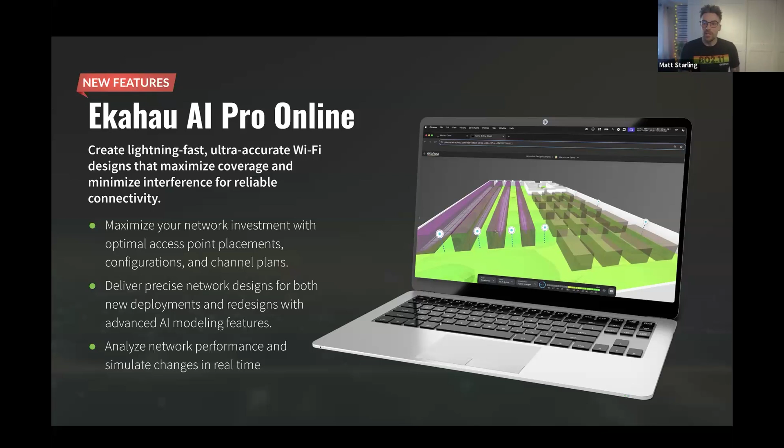There's something I'd like to point out with our Ekahau AI Pro Online: we actually give you two different ways that you can design Wi-Fi networks. Most of us are very familiar with this option on the right-hand side, which we refer to as the traditional method for predictive modeling, designing an RF network, where you take a floor plan, upload it to the software, set a scale, draw your attenuation values for the materials in your environment, draw in areas where you'd like coverage, place simulated access points, and see the heat maps coming from those access points to plan your network.

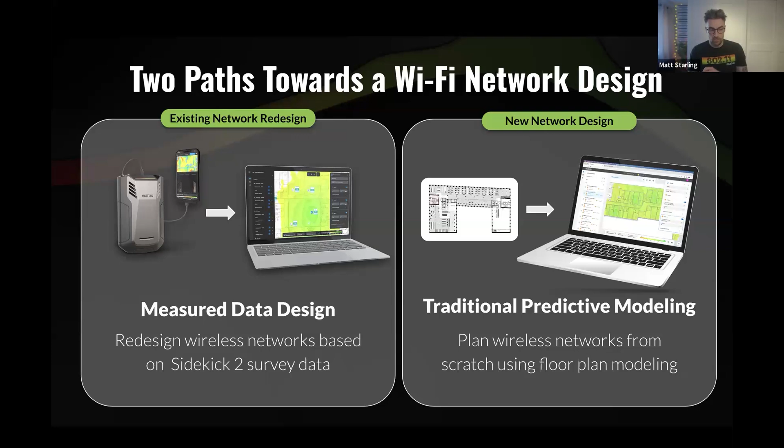We're all kind of used to doing that, but we actually launched a new method to update and design a new network leveraging measured survey data collected with the Sidekick 2 — this option here on the left hand side. So let's say you've already got an existing Wi-Fi network; you can get on site, do a survey with the Sidekick 2, and push that data to Ekahau AI Pro Online without having to draw any walls or obstacles or attenuation values for your materials. We understand how RF propagates in your environment, so you can simulate changes like moving access points or swapping them out for new model access points to see the impact of a network upgrade.

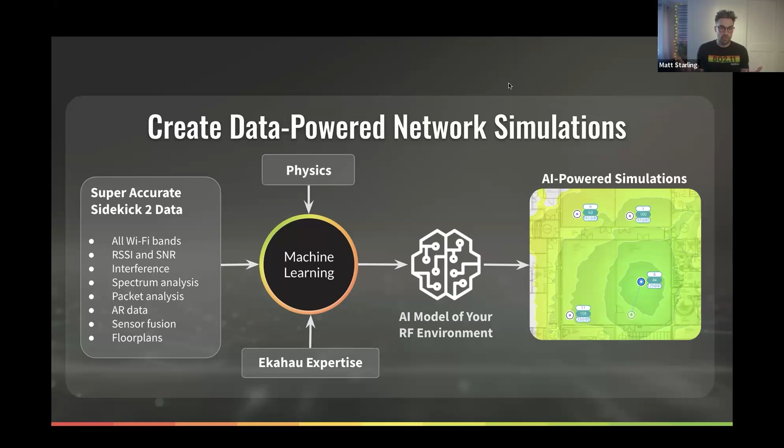The way we do that is once you've captured the data with Sidekick 2, we use machine learning, AI, and a lot of Ekahau scientists' and data analysis engineers' work to build out what we refer to as a digital model of your space, understand how RF propagates, and then simulate upgrading to a new model access point. You can go from one vendor to another. One of the most popular things I see with AI Pro Online measured planning upgrades is simulating going from older networks — just 2.4 and 5 gigahertz capable access points — to upgrading to a 6 gigahertz capable model access point that can maybe do Wi-Fi 7, if you're at that kind of life cycle upgrade point.

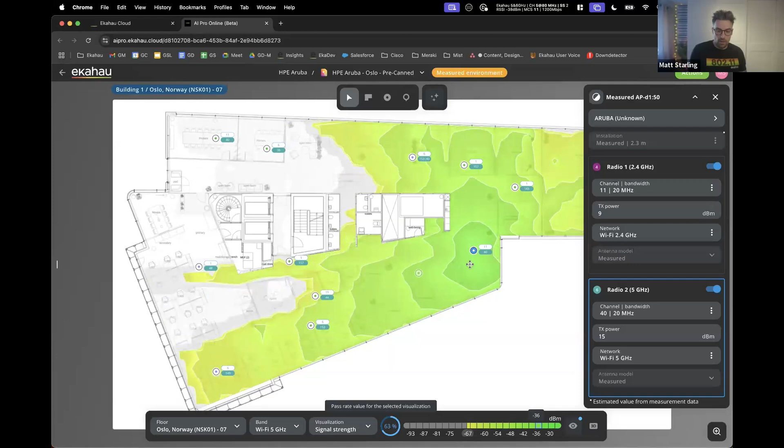That's something we can simulate. Or maybe they wanted to know, if I was to relocate this access point to a new position, how would that impact my coverage or the signal coming from this access point? All I need to do now is simply grab the access point, move it around, and you'll see the heat map will actually update and change without me having to draw anything like a wall or any kind of obstacles. You can see that change in RF propagation from the access point location.

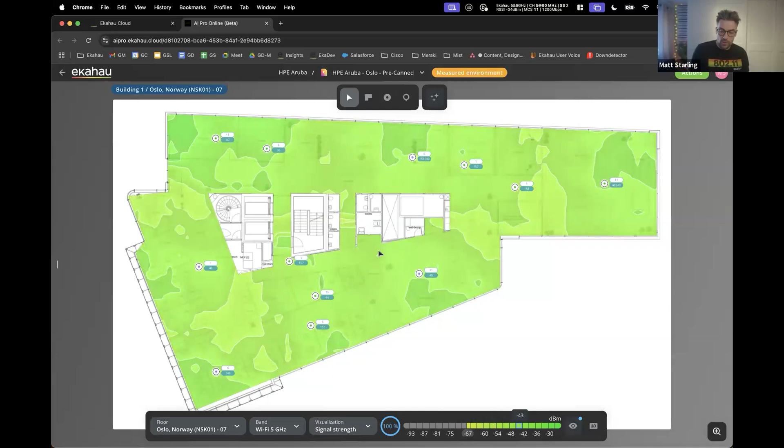So if I want to simulate doing a rip and replace scenario, like a one-to-one replacement and keeping the AP positions, what I can actually do is select all of these access points from the left-hand side, then on the right-hand side, pick my target access point. I'm going to stick with Aruba, and pick a Wi-Fi 7 capable model, so the AP755. As soon as I do that, it now just swapped to a Wi-Fi 7 model of the access point.

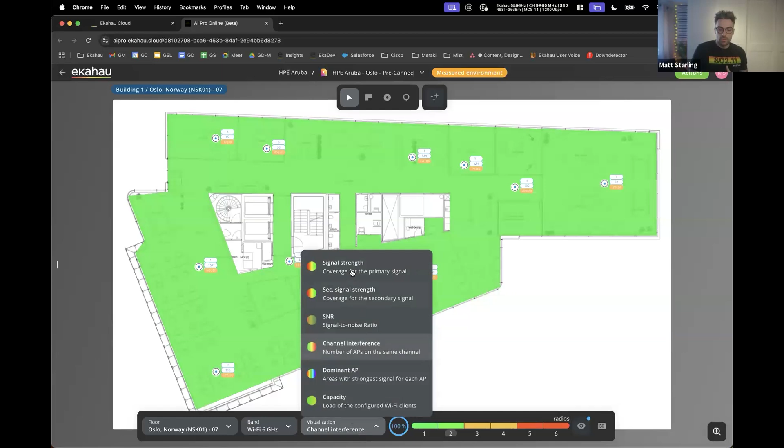If I just close this on the left-hand side, what I can actually see now is the predicted 6 gigahertz coverage based off the measured data collected from the Sidekick. Now I can see the signal strength, the secondary coverage, things like channel interference and lots of information, which is really helpful and handy.

One of the things I used to get asked all the time when I was being engaged for professional services before I joined Ekahau, speaking with customers, they would always ask when we were going to do a deployment for them, a new network design or an upgrade, if they could keep some of their existing AP locations so they can reutilize the cable runs. Sometimes the most expensive thing for a Wi-Fi network upgrade is not buying the access points, it's actually running new cables - think about the downtime, especially in critical environments like hospitals, and how expensive that can be. I can understand why customers want to try and reutilize existing AP locations because of the cabling.

So what you can see here is if we were to keep the existing AP locations, coverage, everything looks like it's going to be okay. However, if we did notice that maybe there was a bit of a coverage gap in this location, we could tweak the positions of the access points, like move them around slightly.

Or if I wanted to, I can come in and actually add another access point as well. So I haven't got to just keep the APs in their existing positions. I can come into here and pick another Aruba 755 access point, and add as many extra ones as I need to my environment to come up with a new design for the space based on a different frequency band that we couldn't actually see before. So it's a real nice, cool way of being able to design or redesign your network based off measured survey data, and it's nice and accurate.

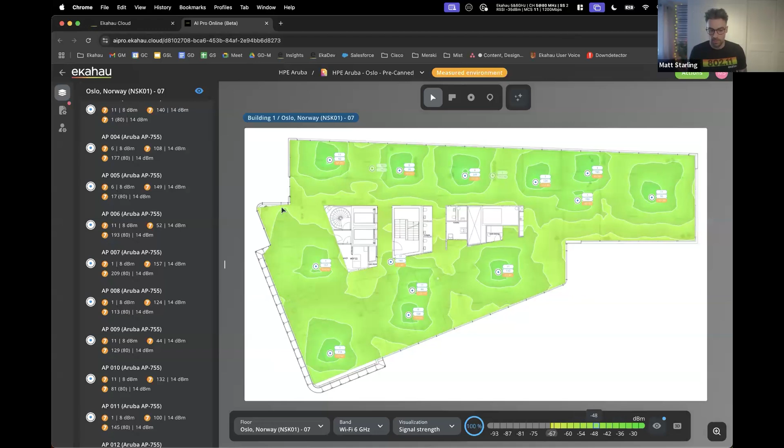So what I'm actually going to do now, unless there are specific questions that have come in, Troy or Stu, around this method of approach for AI Pro Online... We've had a technique for a long time where if you're going on site anyway, as part of your initial on-site investigation, you could manually measure walls and determine the attenuation, then take that back and update the predictive wall model you're building. But is this technique more accurate than what we've already been able to use?

Yeah, that's a great question. The research team did some analysis based on users defining attenuation materials manually versus the measured approach tied to an AI/ML model, and this method is more accurate because we're looking at the complete picture, basing it on real measurements, and understanding how RF is propagating in your space. So not only is this faster, it's actually more accurate too, and it's a lot of fun. So why don't I pass over to you, Troy, and you can show the other methodology of using AI Pro Online.

Yeah, for sure. So that was a question Jamie had in the chat, just wondering about the comparison of the old school manual method versus this technique. Essentially, you can think of it as instead of just taking one individual measurement, you're taking thousands of measurements as you're walking along, performing best practices for your survey.

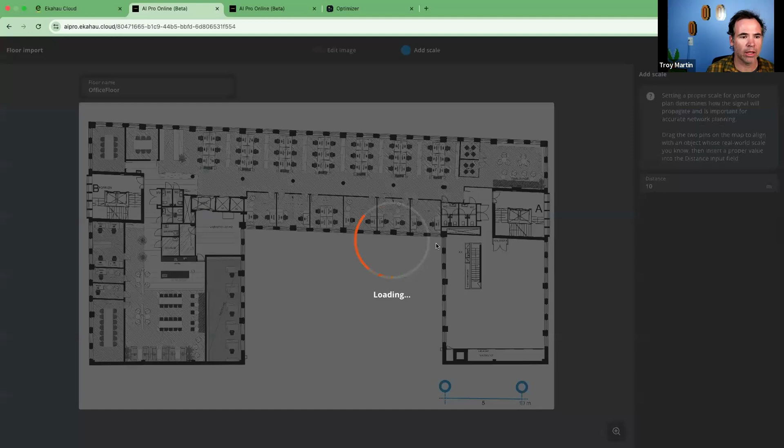Once that's set, we can go ahead and click on finish, import this map image for us. We have the ability that if we wanted to create multiple floors within our building, we could click on add floors to import those new floors, or if we're all done, we just click on finish and we're ready to begin our design.

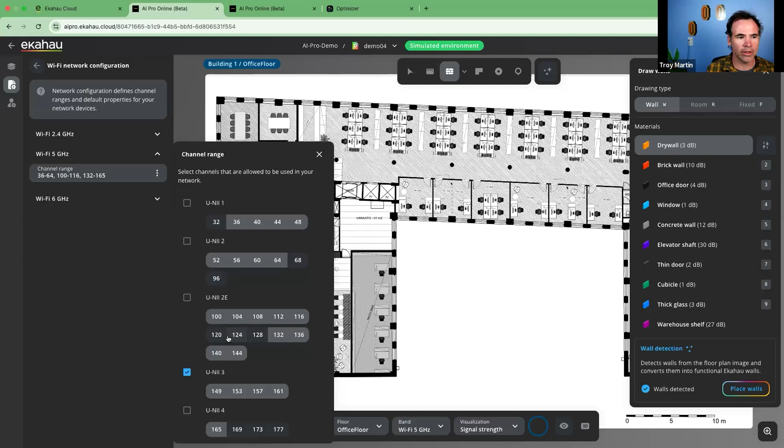One of the other things I like to look at doing, and the reason I like to set my regulatory domain to other, is I like to come in and customize my channels. So if I was designing a site within Canada, based in the Canadian Rockies, due to our regulatory restrictions and the predominant use of radar-based technology, we're not allowed to use channels 120, 124, and 128. I like to see that these channels are available, but I'll come in and manually exclude them so none of my APs are automatically assigned those channels, or I don't accidentally use them in my design. I like to know they're there and have confirmation I'm not using them, especially if you're involved with an organization looking at global-based Wi-Fi projects.

The next thing I can look at doing is selecting the walls that I want to add. Typical to what you've seen before in the desktop version, you have a lot of different walls you can add, some keyboard shortcuts and hotkeys you can toggle between those walls as you draw them. You can add and customize your different walls.

Or if you fall into the camp that doesn't like drawing walls, if it isn't soothing and relaxing for you, if you find it tedious, we tried to help you out. We have a wall automated drawing feature where you simply click on that and it'll automatically place walls for you. Leveraging some AI capabilities, analyzing the image, we're able to draw different wall types, so you can see different wall structures for inside walls, doorways, outside glass, concrete structures, those kinds of things.

You can also add attenuation objects. So if I wanted to quickly model my cubicle, I could modify this, make it a little bit smaller, let's say it's a 1 meter high cubicle. I can quickly draw this in, add a cubicle here, and just to represent this, I'll draw a couple cubicles in.

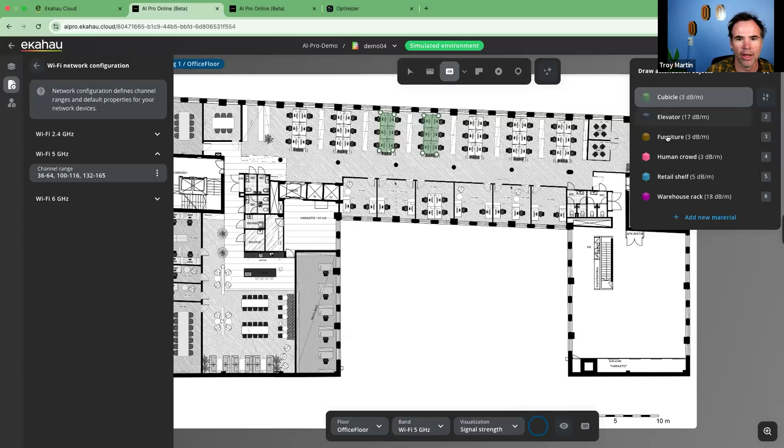We could also add a new material. I could create a new material and call this file cabinet, and for the file cabinet, let's put it at 1.5 meters, and change the attenuation to 4 dB per meter. The special thing with attenuation objects is it varies the attenuation as the signal passes through that material, so the larger the cross section, the more attenuation you'll experience. For my file cabinets, which are separating each of these cubicles to give a sense of isolation or more secret access while you're at site.

Oh, did I not save it? Creating a material. Yeah, I think you didn't hit save, that was all.

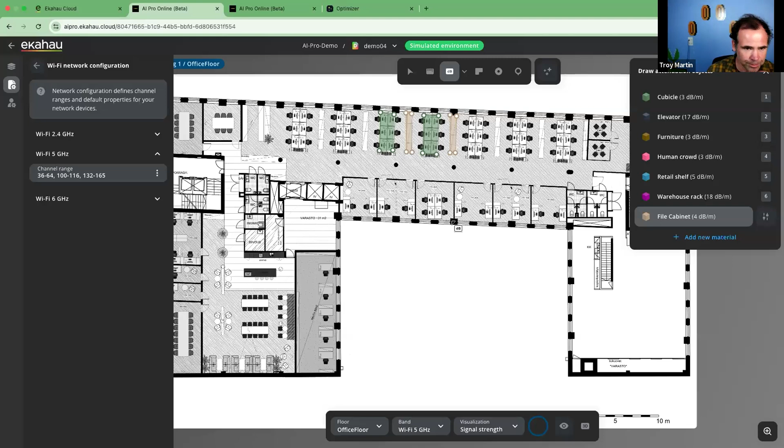Let me spell this correctly. Set our attenuation to 4 and set the height to be 1.5. This time I'll make sure I save it. And as I save it, it appears on my list, as expected, and I can quickly draw my file cabinets in here. And with those items added, going back to my walls, I can set all that material there.

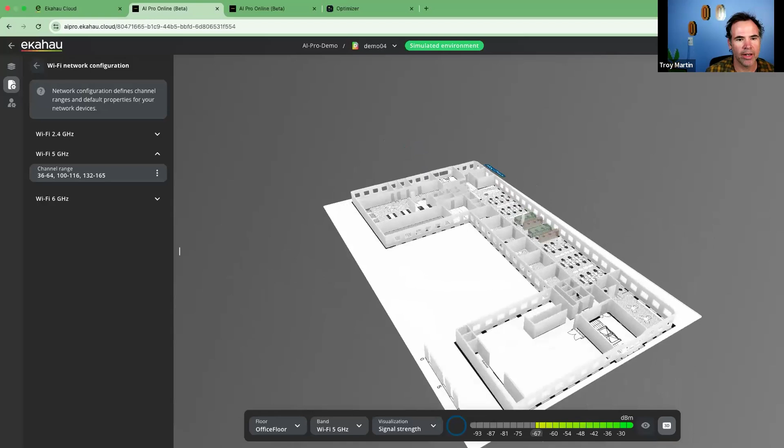We do have the ability that you can now visualize all of your design in 3D. So if I click on the 3D button, I can now quickly see all my walls that have been drawn in, I can see my cubicles, the file cabinets that I've added. I can rotate, look through different perspectives on my building, just confirm that my windows and doors and everything's placed accurately as I'd expect. Once I've done that, I can jump out of my 3D visualizer.

The next thing I'm ready to do is start placing access points. Actually, before I even place access points, I just want to dial in what area of this floor plan image do I care about for my design. By default, Ekahau doesn't know what you care about, where you need the RF, so it assumes the area represents the entire image of the floor plan. We can see that area represented by the green box around the perimeter of our floor plan.

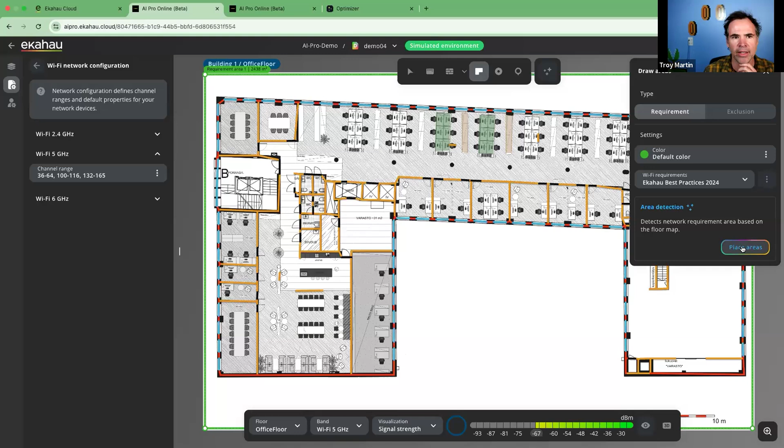Some people care about Wi-Fi outside. There might be areas where employees have fresh air breaks, or parking areas that need coverage outside. You can dial this in by clicking on the area button, and instead of redrawing the area manually, I can automatically detect where that area is, replace what's existing, and it draws in the area for me.

Now that I have the area dialed in and I'm showing Ekahau where I want to focus my Wi-Fi design, I can start looking at adding access points. So if I come in here and pick a manufacturer, let's grab a Juniper Mist AP, the AP 47, and then I can start placing it.

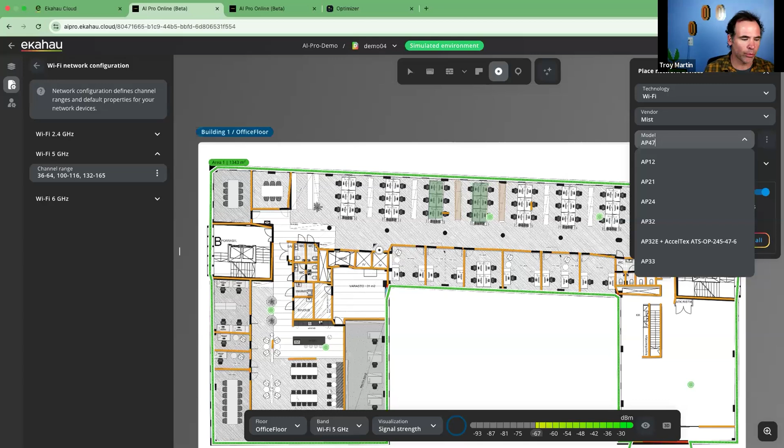One of the really interesting things with AI Pro Online is the auto planner, or assisted planning, kicks in right away, already giving me suggestions of where it thinks I might want to start placing access points. But I can leverage my experience and expertise evaluating this floor plan, having insight into where employees will sit, where they'll walk, where they'll naturally move throughout this environment, and place access points appropriately based on those insights.

As I start placing APs, you'll see that the assisted AP planner starts moving APs to where it suggests additional access points need to go. So it's reacting dynamically to where I am placing access points, offering me more suggestions.

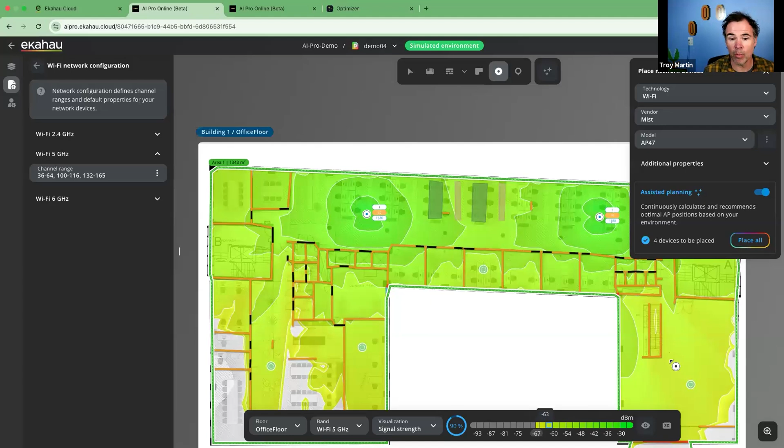So if I start adding access points, maybe I'll place some APs where it suggests, if that seems like a reasonable spot. I can put APs more in the center of the room, make it aesthetically pleasing for the humans looking at the floor plans. Maybe I know this is my larger conference room, so I'll put an AP directly in that room so it has line of sight to everyone sitting there, so they may get slightly higher MCS rates, consuming less airtime as they transmit while everyone joins the same Zoom call in the same conference room listening to the same speaker.

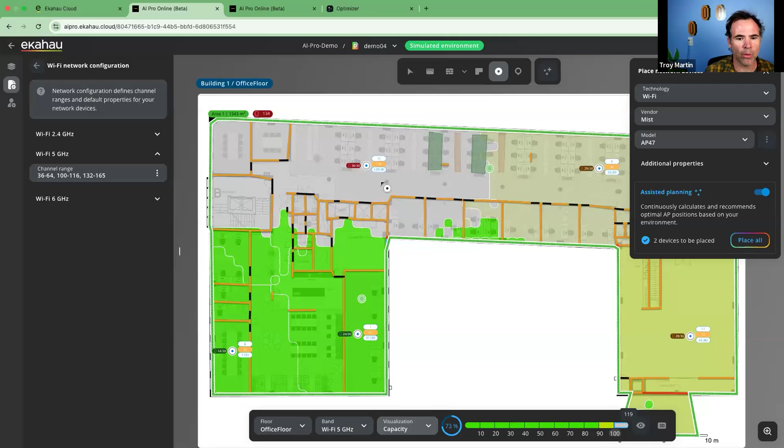Sometimes that happens. Now that I have coverage everywhere and my primary signal strength looks pretty good, I can also flip to a capacity view and evaluate my capacity status. What we're showing right now is a combination of areas where we've exceeded airtime utilization, as well as APs that currently have too many devices per radio.

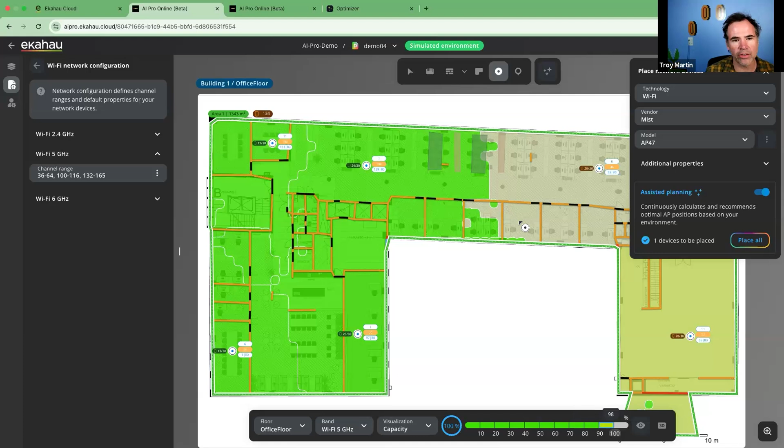So how do we fix this? Well, one of the common solutions is to add more radios. As I add more radios, I also want to be mindful of managing co-channel interference. But as I add more access points, you can see I'm freeing up more airtime and reducing the number of clients spread across each AP radio. So I can put in a few more access points, maybe spread out these APs.

But now my capacity model looks like it may be meeting all of my design requirements. I'm not overloading too many of my access points with number of devices, and I should have sufficient airtime to handle my bandwidth requirements.

As a last check, one other thing I might want to do is jump into inspect mode. In inspect mode, I can imagine a person on the floor moving from one location to another, maybe walking from their desk to a meeting room, or it's lunchtime and they need to heat up lunch or grab a coffee because they're up too late working on a new product or feature.

As I move the slider around, I can see which AP is currently giving me the greatest signal strength, most likely the access point I'd be connected to. I can also see which access point is likely my roam-to AP. As I walk down hallways, I can see which AP I'm currently connected to, which APs transition into that roaming state, and as I keep moving around, which access points I'll eventually roam to. I can make sure I've placed my APs and set my transmit power so that my clients are roaming at natural roam boundaries, or locations where I want them to roam in my environment.

And I'm not creating any unnecessary sticky client situations or placing APs in hallways and creating those long tails where clients have the illusion of being healthily connected to an AP, and then they round a corner, take 3 steps, and quickly fall off the edge of the network.

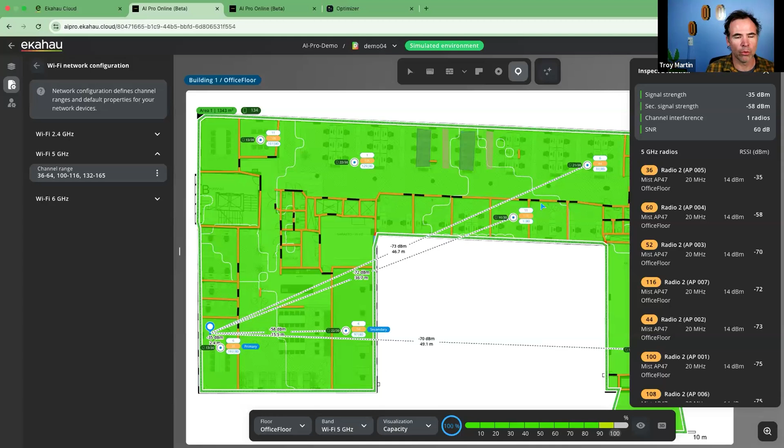Right, so these are all new cool features that you can play with and experience as you walk through your Wi-Fi design workflow, leveraging AI Pro Online.

Great demo, Troy. Before you stop sharing, there was a couple of questions I think you'd be able to answer quickly. The first one was around capacity - how did you bring up the capacity visualization? I think some people missed that. Basically the option down there, right where your mouse is for the visualizations, you switch to the capacity view. Is that right? Yeah, correct.

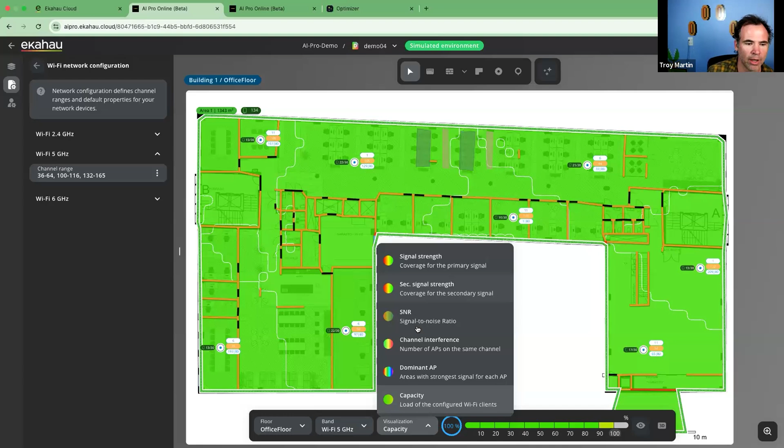Right, so we got a list of the common visualizations that we're all familiar with leveraging AI Pro on the desktop version, so I just changed to the capacity visualization to see that. I can also get a summary of all my design requirements by clicking on this indicator - right now it's 100%, but if I click on that, it'll give me an evaluation of what percentage of my floor meets my design thresholds from those different perspectives.

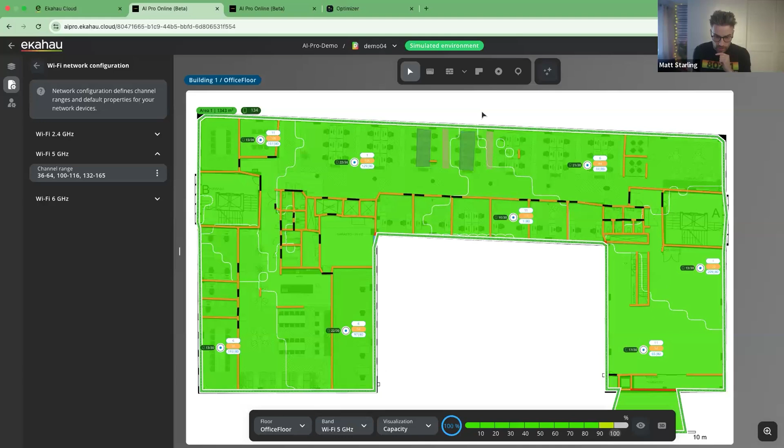And then if you click on the outer part of the area that was drawn for you, or you can click on the area, this is where you'll be able to see the capacity requirements that have been set. So if you just click on like where the green line is on the area, on the right hand side now.

So what actually happens is, when we do the area for you, or you draw the area, based on the size of the area that's drawn, we'll automatically assign a rough amount of clients for you on 2.4 and 5 gigahertz, but you can come in here and modify that to whatever you want, to specify the amount of clients you want to support. And then you can change the traffic type - low, basic, or high - to meet your requirements, or you can set your own as well.

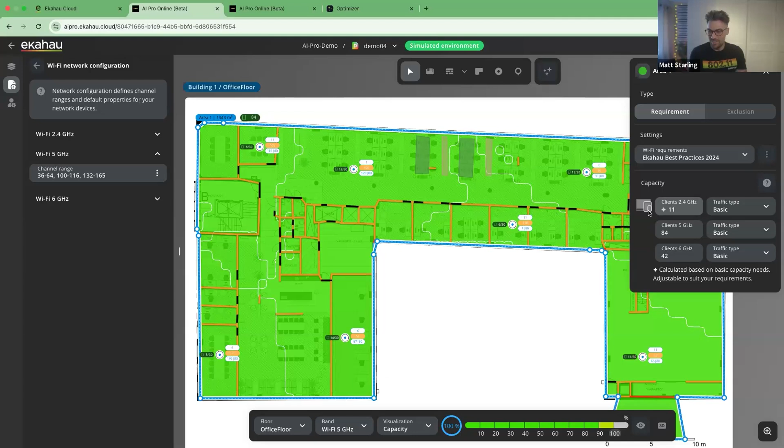So in this particular site, I now have a lot of IoT devices, right? Yeah, those legacy light switches connected to the wall. Right, but based on our recommendations, they upgraded from their legacy 2.4 devices, and now they just have a small handful of them.

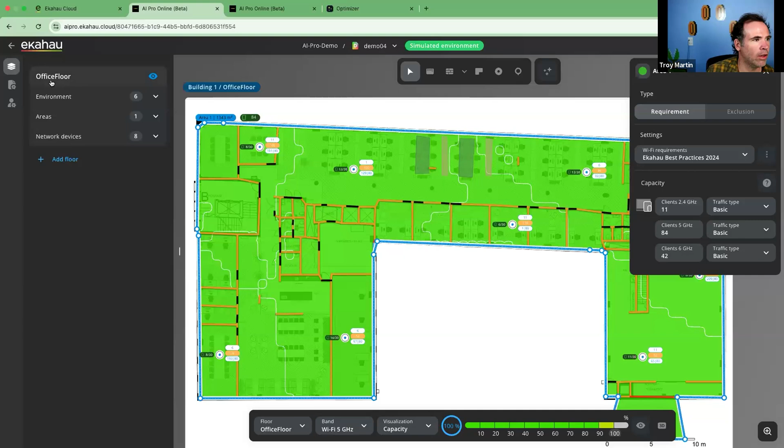You also have the ability, if I click on floors, to add another floor. And if I import another floor plan into this, doing the same thing, I can modify the grayscale, I can remove a lot of the white space. And if I click next, I have the ability to add this floor within an existing building. Or if I wanted to create multiple buildings as part of a campus, I could drag it and isolate it there. But if I leave it as part of my logical building within Ekahau, and set the scale for this floor plan as well.

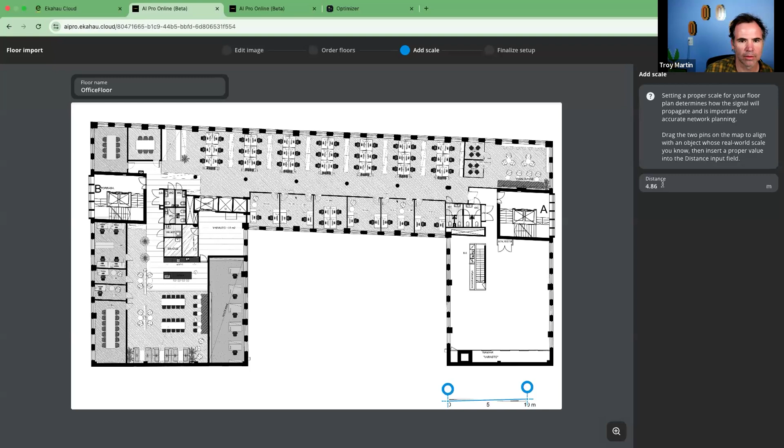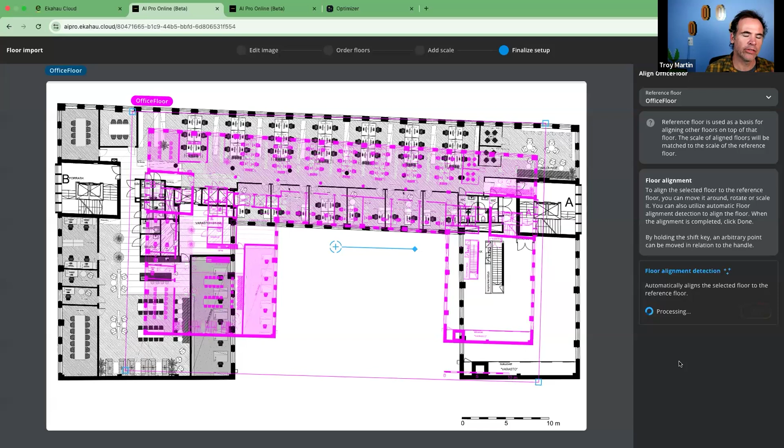As one of the final steps, I'll have the ability to try and align this floor, right? So I can manually manipulate it, I can shrink and stretch it. But if that's too much, and I don't want to go through that effort, I can click on the align button, and Ekahau is going to automatically look at both these images and try to align them for you, taking away a lot of that tedious task of doing rotations of the image, finding the right corners to match up against.

And when it's done thinking, it'll present to you what it thinks is the overlay of one image, or one floor plan, on top of the other. And if that makes sense to you as the human, instead of trusting Skynet completely, you have the chance to review that. If it satisfies what you're looking for, you can click finish, and it automatically adds that second floor now to your project. And you can go ahead and model RF propagation up and down between different floors.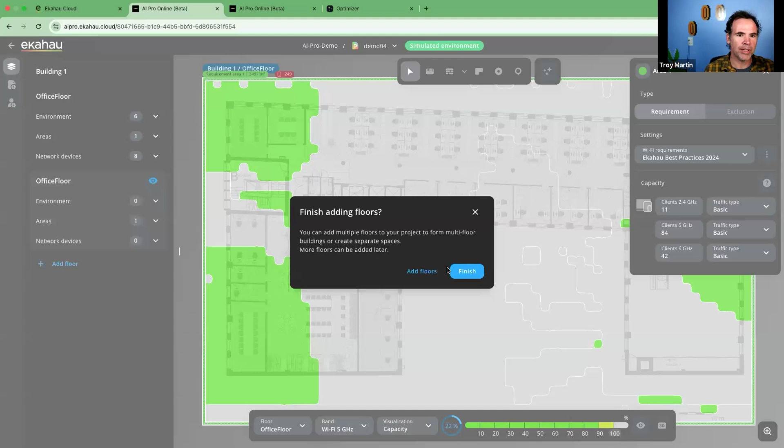Amazing. If you don't mind just flipping back to the other floor, Troy, one other question just came in around the attenuation objects that you drew - can you copy and paste attenuation objects? So if you go back to the other floor and the cubicles that you've drawn, you can just select the cubicle or whatever it was, you can copy, you can paste, and then you can move it around. So yeah, you can copy and paste attenuation objects inside of Ekahau AI Pro Online.

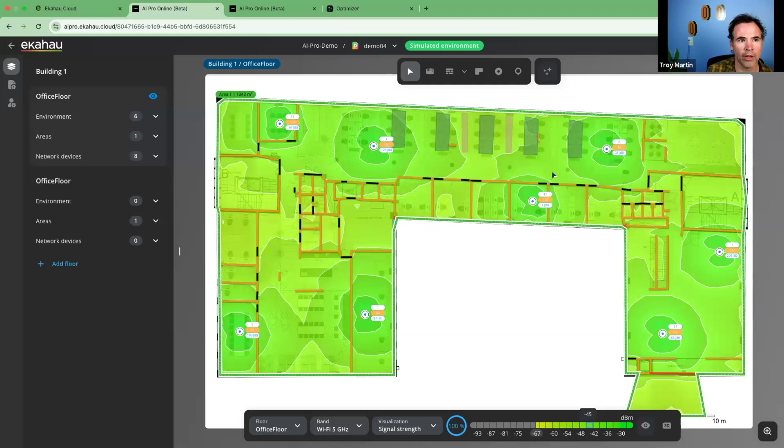Was there anything else that you wanted to demo on this before I steal the share back from you, Troy? That was everything for now, but the features are coming quick and fast to AI Pro Online.

There's an aggressive transition to incorporate as many features as we can, so it's kind of neat to play with it every week and see what's new and what's changed.

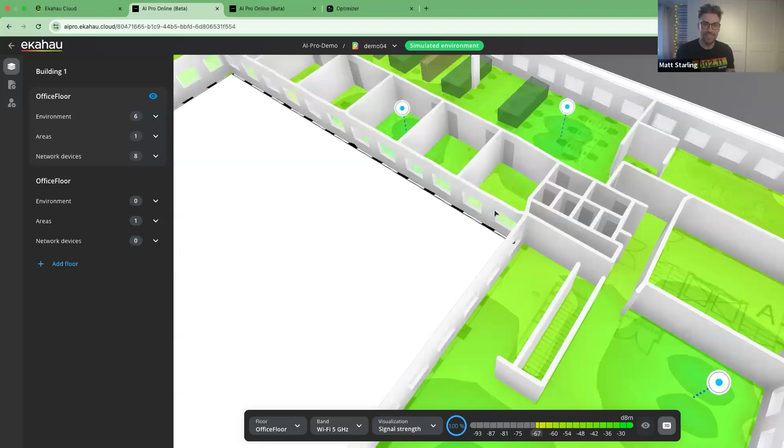Jacob asked if you could quickly show one more time a 3D view now with the nice heat maps as well. Yes, this is amazing. It looks really, really cool.

Just to chime in on the questions there about feature comparisons, Troy hit it right on the button: we're moving very fast for feature parity, and you're going to see this platform overtake the desktop very quickly.

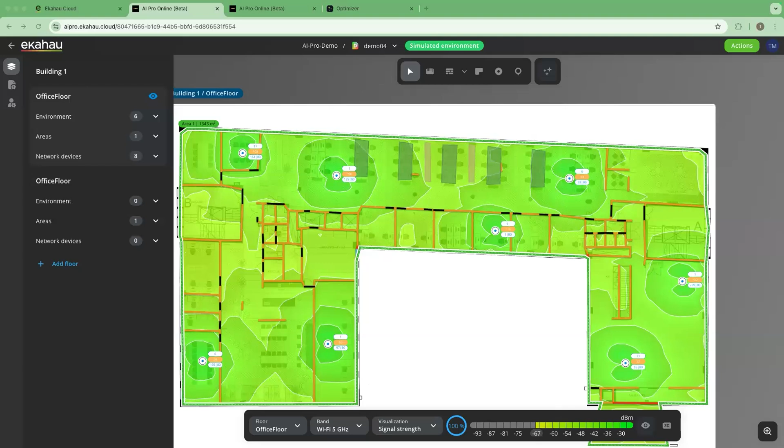Okay Troy, I will steal the share from you. Yeah, replace current share, and I'm going to share my desktop one.

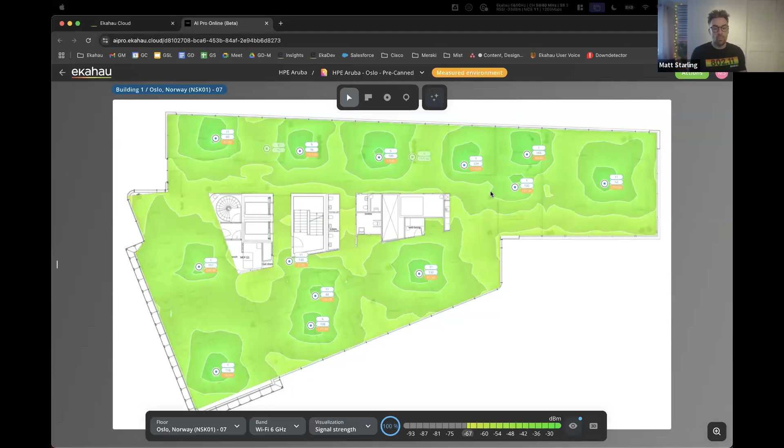There's one other question I wanted to answer quickly from the Q&A. Based on the measured method of doing a redesign you've seen here, someone asked: now that I've updated all the access points and put them in different positions, is there a way to reset this file and go back to the original measured access points? The answer is yes, you can totally do that.

All I need to do is open up this panel on the left hand side. I can select all of these new network devices, these new Wi-Fi 7 Aruba access points, select them and delete them by hitting backspace on my keyboard. You can see I have these deleted devices here.

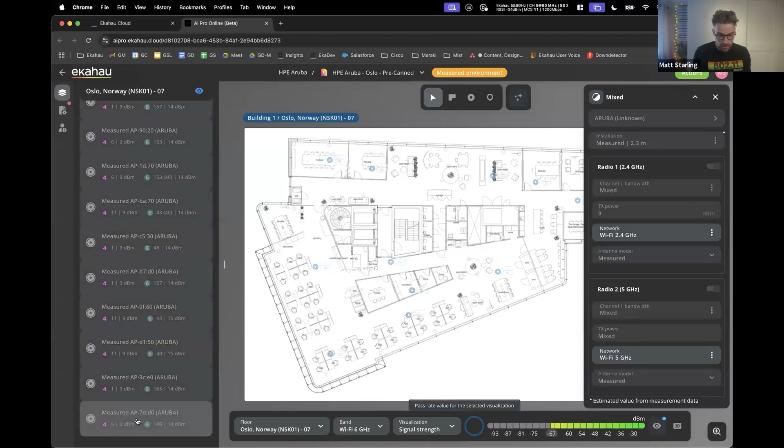If I select this one and scroll down to the bottom, hold down shift and select it, I can then right click and restore devices, and it puts the original access points back in their same locations from before, going back to that original measured survey data that we had. So you can totally go back to the original survey data from the file.

So a quick recap of what you saw in Ekahau AI Pro Online: some of the new features included the capacity planning that Troy demoed, which gives a nice visualization for the amount of clients you want to support on your networks and the maximum amount of associated clients per radio.

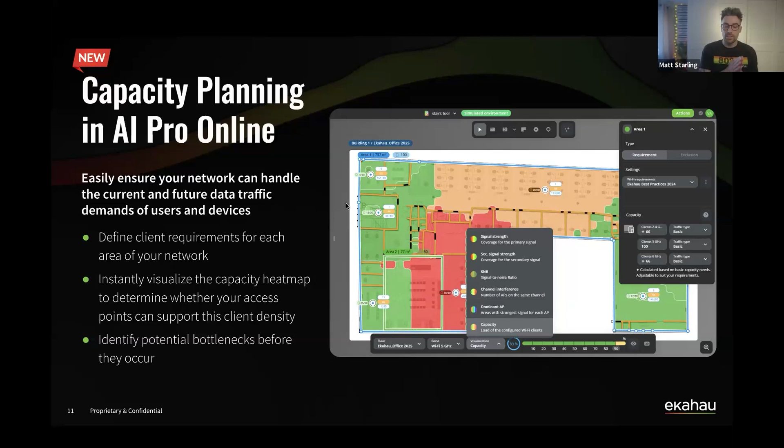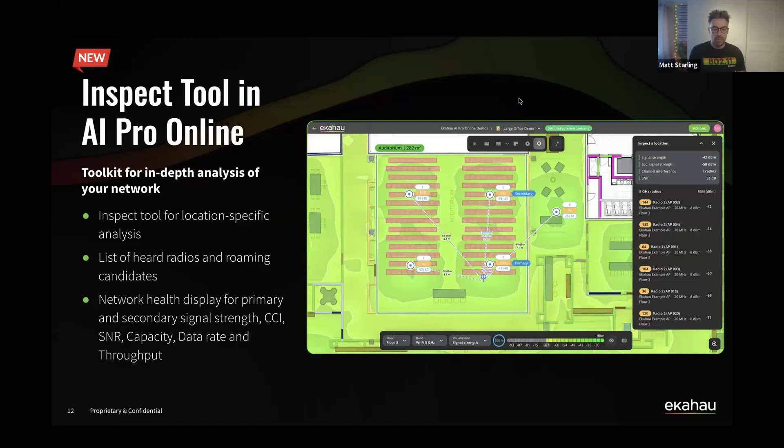Then a really nice new feature is the inspect tool. This is great for visualizing how different clients may roam and transition between spaces in your network, and if you used the right type of access points and antennas, or want to try directional antennas, to see how things and trends will look in your space. Again, a really nice new feature.

So what are some new features coming soon to Ekahau AI Pro Online? First, one I know a lot of you will be excited about is custom reporting. You'll be able to build out your own custom report in Ekahau AI Pro Online.

Think of it like building an online website, with simple drag and drop for relocating different widgets where you'd like them, but fully customizable to your specific company or the company you're doing a design or analysis for. You can input your cover page, table of contents, choose if you want heat maps, AP names, get really granular with what you want to see, then save that report and use it over and over again.

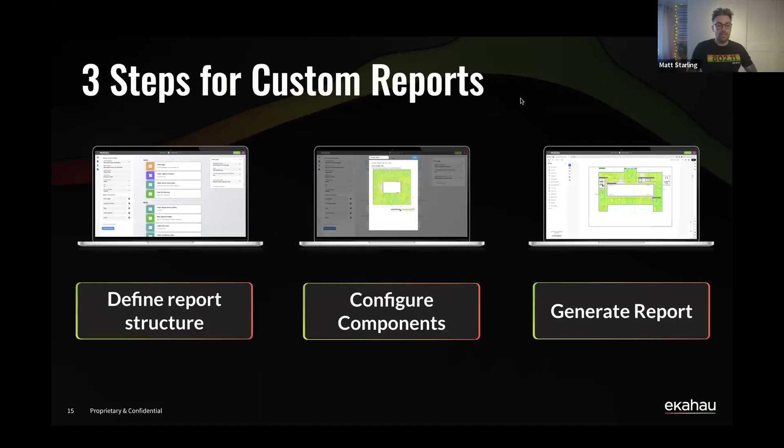It works in three simple steps to define your custom report. The first step is defining your structure. You may want a custom report for your predictive designs, a separate one for assessments you do for people, and maybe even one for just the installation team that's going to be installing the access points.

So you might actually just want to have a simple report that's got a cover page, logo, table of contents, floor plan with AP locations on, but with no heat maps. You're going to be able to save the different types of templates you want in your AI Pro Online, and then reuse them over and over again for your different projects.

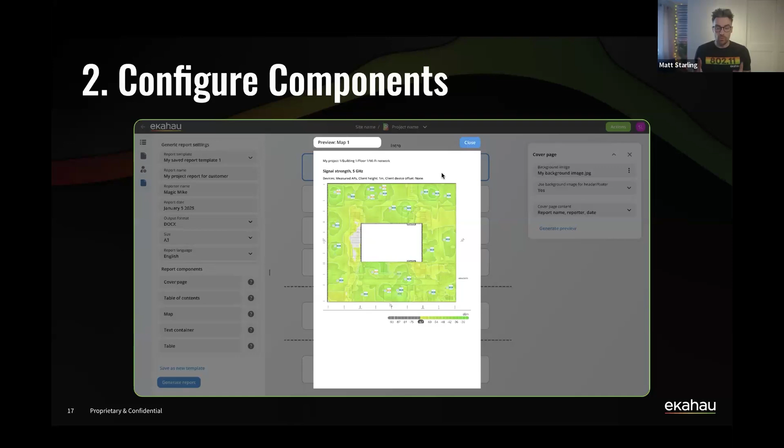Once you've defined your structure, you can then configure the components for what you want to see. For example, signal strength from 5 gigahertz. Maybe you want the channels on, maybe off. Maybe you want the APs on the map, maybe just the heat map. You can define what you want easily in the online version and customize it to what you want to see, then generate a report. The report you'll get will be in either Word format or PDF, which you can then provide to whomever after.

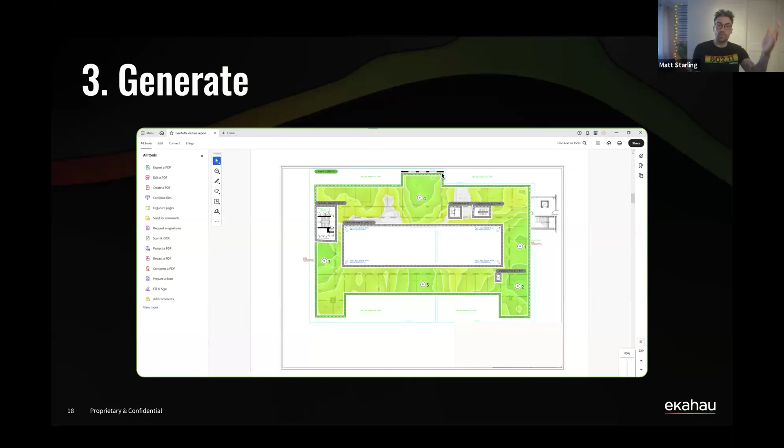What else is coming next, Troy? Yeah, so some of you in the chat have already been foreseeing this. We are adding some customizations to the heat maps, things you may be expecting or want to massage and manipulate the data so it's more obvious what's going on. Some of those customizations include adding device offsets, so you can pick and choose what devices are most critical and important to your environment, and then visualize the heat map from those perspectives.

This assumes you're doing your survey with your trusted Sidekick 2. You can calculate the offset of that device that's important to you relative to that Sidekick 2, and then with the data collected using your Sidekick 2, visualize how it's different from those devices.

And then as you generate your reports, you can have heat maps that represent, this is the heat map seen from our corporate laptop, this is the one seen from our barcode scanner, this is the one seen from our corporate standard smartphone, these are the IV pumps we have in the hospital and how they see the RF energy. You can visualize to see if there's any coverage holes or gaps, and then optimize your design specifically for those devices most critical to delivering your business outcomes.

We also have the ability we'll be adding shortly in the future to change the visualization heights. When you look at the heat maps, it's a horizontal plane of the RF coverage or whatever visualization you're looking at. Generally, by default, it's the visualization of what's going on 1 meter above the ground. But if you were designing for a warehouse, for example, you may need the forklifts to have Wi-Fi connectivity at the ground level as they're driving around.

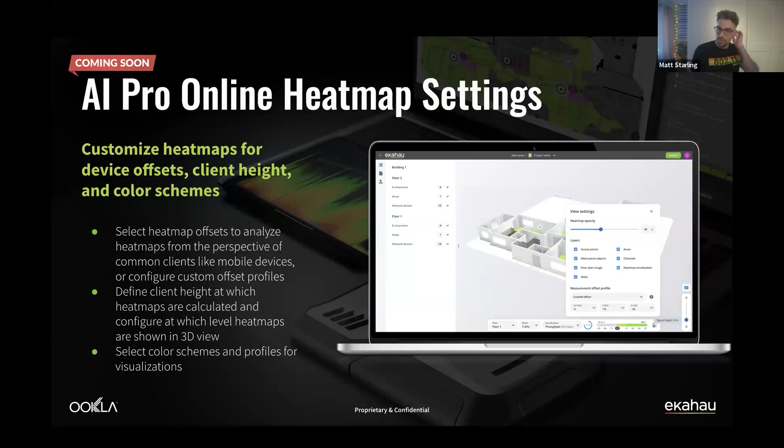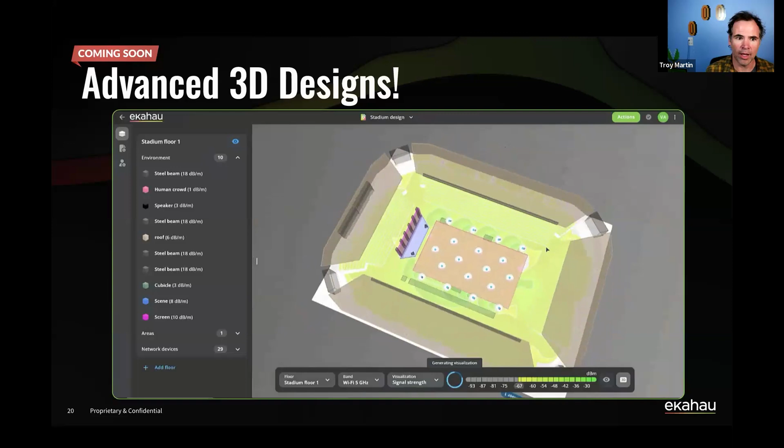Yeah, absolutely. Something that's been asked for quite a while, a feature coming down the pipe, is we are adding the capability to create 3D models, which will allow you to model floors that are angled, staggered seating within stadiums, conference halls, auditoriums, that kind of thing. Matt's queuing up a little demo so you can see what this looks like live. I think this is very exciting for modeling 3D in a lot of challenging RF environments.

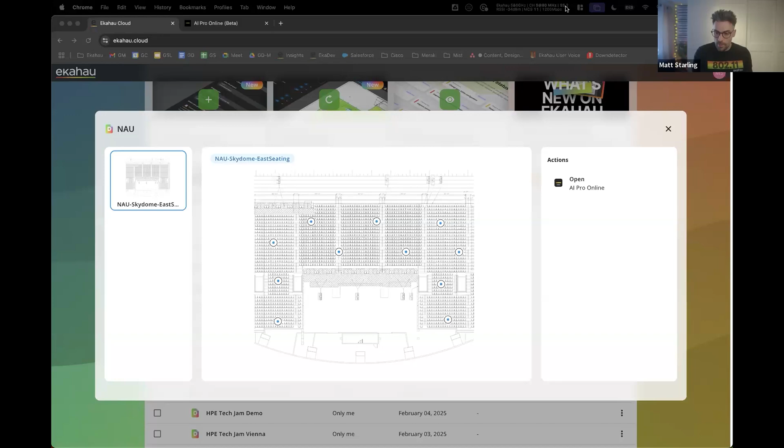The reason why I asked is because, even though we just showed it in the slide, I do want to do a quick live demo as well, but I just need to turn something on, which I'm doing on another screen before I actually show you it. So just bear with me one second, and then I can bring it back to the screen.

Okay, that should be good. Let me move this over here. Okay, go back to sharing my screen.

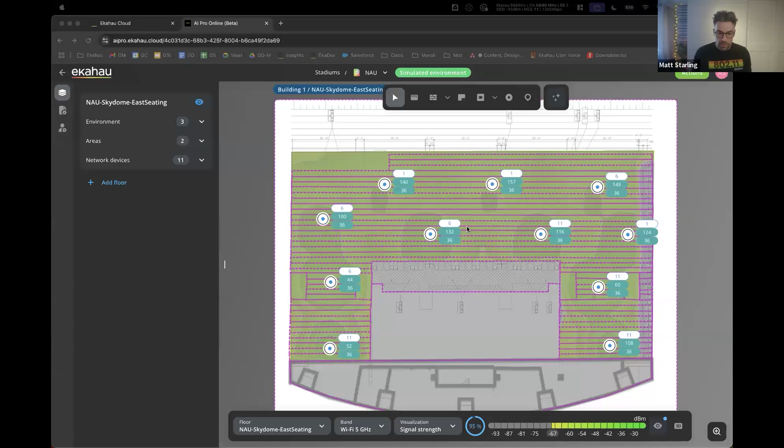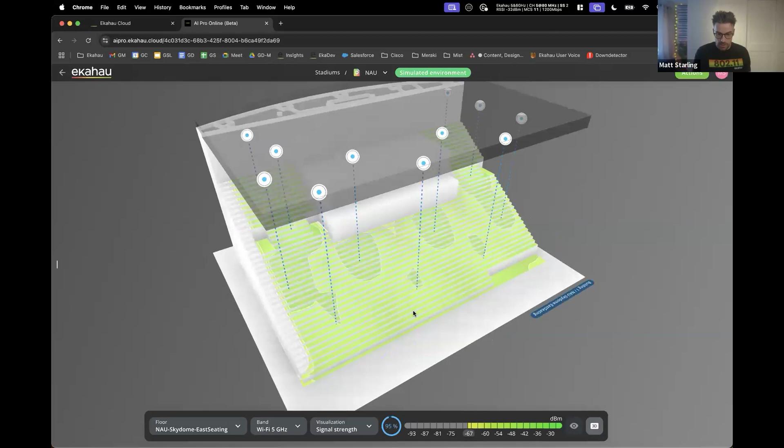And here we go, so now you see my screen. Basically what I've done here is I've got just a section of the Northern Arizona University Stadium, one of the stands. I placed some access points, and I want to show you what this now looks like in 3D, because now we can actually see what we'll be able to do very soon, and you guys will have access to in Ekahau - being able to model your space for auditoriums, stadiums, real complex environments. You can see that we've got the tiered seating going up towards the top of the stand.

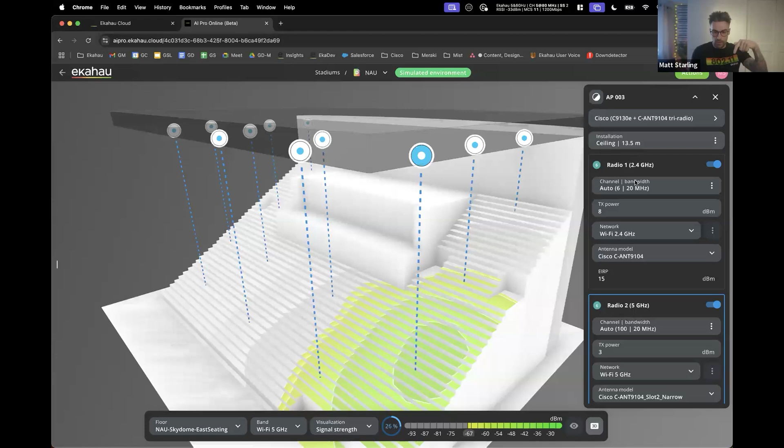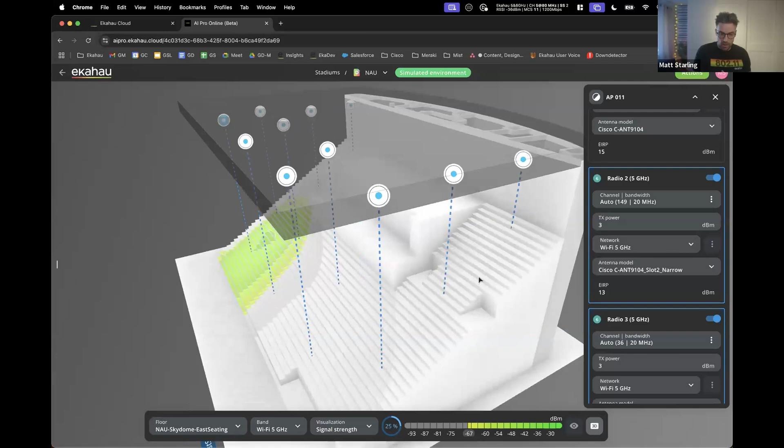I've configured an overhang over the top of the ceiling, and mounted some Cisco access points with the 9104 antennas pointing directly down towards the ground, and configured some transmit power. You can see the coverage going down towards the seats at different levels. So you can visualize different APs one at a time, and see the different amount of seats it's potentially covering. This is going to be something coming quite soon to Ekahau AI Pro Online - just showing you a little live demo, a little glimpse at a part of a stadium.

You might want to do this for very large auditoriums or complex environments, like cruise ships or any kind of space where you need to get a little bit more granular with building out the model for a more complex environment.

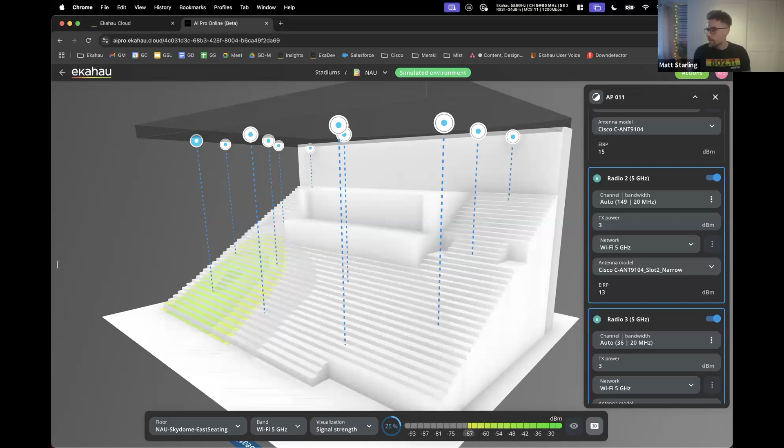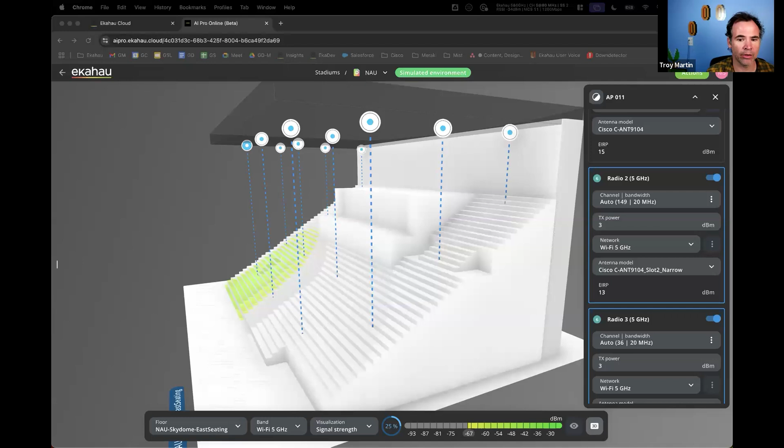We'd have the ability to not only model overhead coverage, but also represent the propagation if an AP was mounted under the seat, to show what that would look like. So all the different styles and techniques you'd want to model and simulate as you evaluate which AP position best meets your design deliverables. Overhead may have more or less access points than under the seats, and you can come up with those what-if scenarios once you have a wildly accurate model to put together for preparing your design.

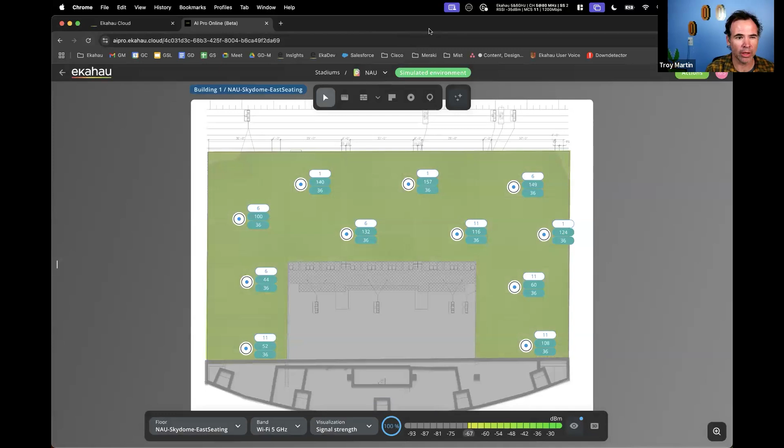To make that happen, it's just a simple process of adding an API key, which Matt's going to give you a little walkthrough of, showing some of the information you can glean from that integration.

Yes, so let me jump into another project file. I did see quite a lot of questions very quickly in the Q&A in the chat — we'll try and come back to them a little bit later on today, because I've got a few other things we really want to show you before the end of the webinar.

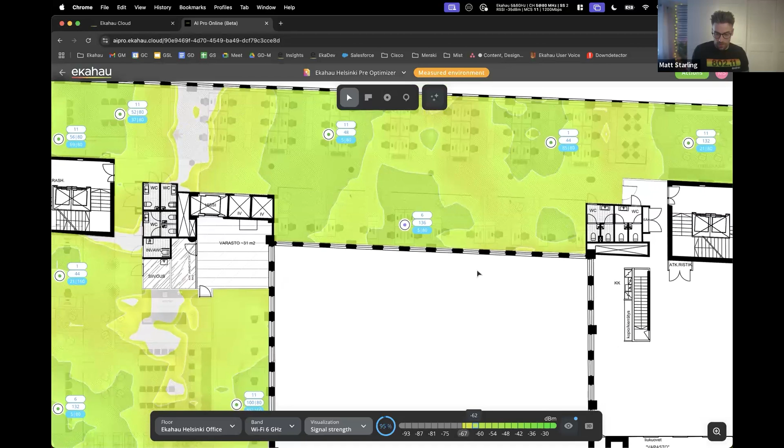What we've got here is a survey file from the Ekahau Helsinki office that we collected quite some time ago. We can see the different visualizations, like secondary coverage for 5 gigahertz and 6 gigahertz. We purposely made some tweaks to this network to make it not so optimal, before running it through our optimizer to see if we could find ways to improve it. Let's focus on this access point — you can see it's using channel 136 on 5 gigahertz, and channel 5, 80 megahertz wide, on 6 gigahertz.

Maybe you've gone and done a survey for one of your customers, one of your environments, one of your networks. You've got that survey data, and then you go away for a few weeks or months. Someone calls you and says, 'Hey Matt, hey Troy, we've had some reports that there's some issues with the Wi-Fi at location X. Can you take a look to see if there's anything you can do to improve performance, or if something has changed?' Typically that would require you to go back on site and do another site survey before you can start doing analysis and assessment.

But what we can actually do now, based off the measured survey data, is connect via API key to your vendor cloud dashboard and pull in the live changes from the RRM — the channels, the transmit power, connected client devices — and see if the network has had any improvements, or maybe some changes that might cause issues. Let me show you quickly how you would do that.

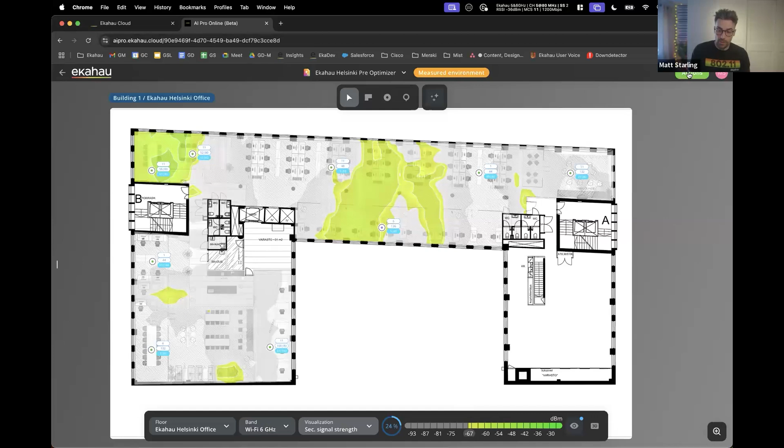I'm going to simply click on the top right hand corner where it says Actions, Connect to Live Network, Proceed — this is where you'll need your API key. I'm just going to input it here and then click Connect. Now it's actually going to go and fetch the live configuration from the dashboard, and update the heat maps and all the propagation you see on the floor plan based off that live data pulled back from the dashboard.

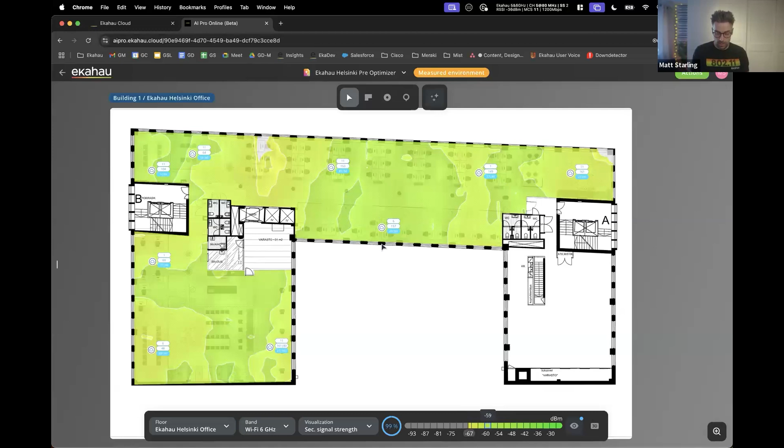So if I zoom in on this access point, you can see the information has changed. I can click on this access point and see the transmit power that's being used, and the channel that's being used as well. You can see that it had an impact and change on the network.

And if I come over on the left-hand side, you can actually have an option to automatically refresh the API data, and you can set that to be every 15 minutes or every 30 minutes.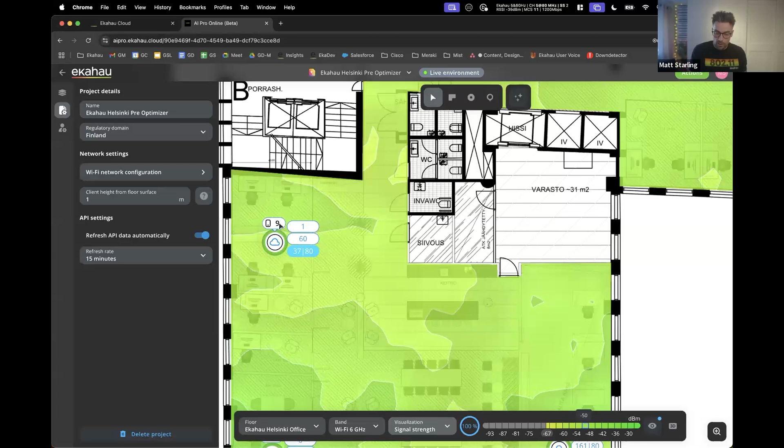Now if I just go over to signal strength, and go to an access point, you can see the live amount of concurrent connected devices to the access point, so we can see how many users are connected. It's not too busy in the Helsinki office right now, not surprising since it's close to 8pm, so I'd assume there's not that many people in the office, but when the office is busy, you can see the amount of devices associated.

If RRM had kicked in and there's not strict guardrails on, let's say, the transmit power, maybe the access points might have turned their radios down quite significantly and introduced some coverage gaps that you could identify quite easily here. Or maybe some of the channels that changed might be causing interference, things like that. So you can do some remote live analysis based off your measured survey data connected via the API key, which is really nice to visualize and see.

Okay, let me jump back to the slides.

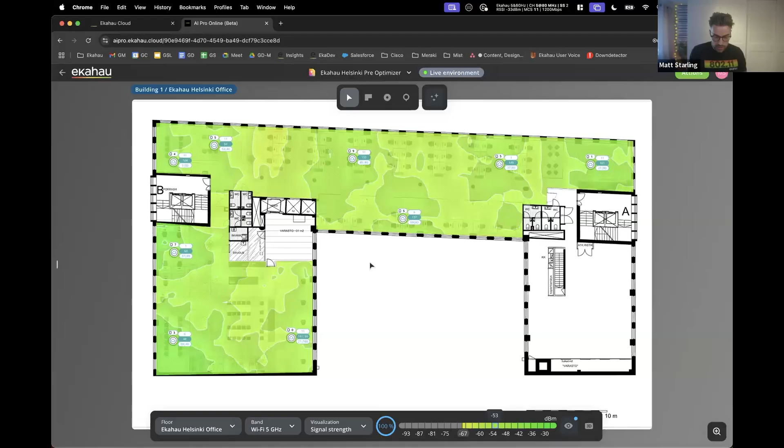So next, Troy, I'm going to hand to you for some of the survey app updates.

Yeah, so a few new features are coming into the survey app that you can leverage on iOS. One of them is getting a convenient list of all of your access points on your floor plan, so you can scroll through and see what their names are, what technologies they're operating on, what channels they're advertising. It's a very quick and easily accessible side panel that you can look at.

We've also updated the Wi-Fi generation numbers with convenient color codes that allow you to quickly, at a glance, identify if there are any misconfigured access points, legacy APs, or rogue access points in your environment running older technologies. Those colorful icons also display the difference between Wi-Fi 6 and Wi-Fi 6E, so you can confirm which access points actually have 6 gigahertz enabled on the radios. Some of those APs, for whatever reason, might not be running the right firmware version that allows them to enable that 6 gigahertz radio, or they're mapped to the wrong RF group or AP group, so they're just not running in 6 gigahertz mode. So you can see that.

And we also support Wi-Fi 7, so we will automatically detect and represent any access point radios that are supporting and configured to run in Wi-Fi 7 mode.

Lastly, we have expanded our ability to share projects directly from the survey app. Any of your field technicians running around on site, when they've completed gathering their data, performing that survey—maybe they're a new survey person—after a couple hours they want to confirm they're gathering the information you require, or they want to share it at lunch or before they leave site at the end of the day. They can share those projects and make backup copies just in case, so when they go for supper in the evening and their car gets broken into, or someone swipes their tablet or sidekick from the trunk, you don't lose that data. So it's super important to make backups, which I always like to do before leaving site at the end of the day.

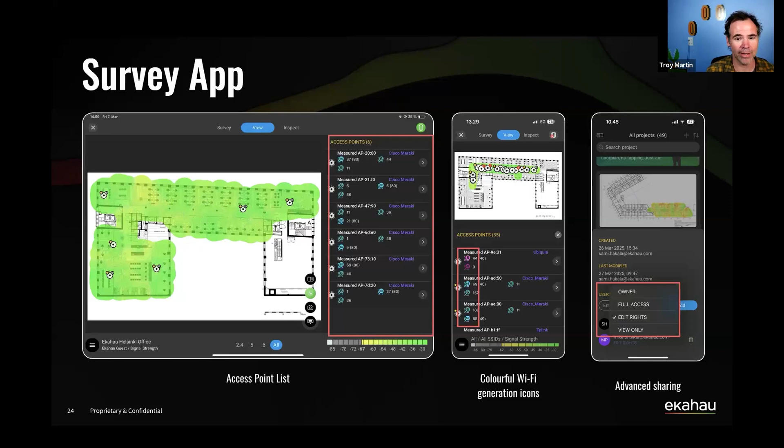And then for anyone who wasn't aware, there's also the Just Go survey method, which is incredibly convenient in scenarios where you don't have floor plans.

My family actually just watched the movie Novocaine, which is kind of like a new version of the John Wick series, which made me think of the Mission Impossible series of films. There's a whole thread of chains that go through my mind here, but I'm always blown away—I can believe everything that happens in Mission Impossible until they get to that scene where that one super hacker on the team is able to find accurate 3D models of every building they're trying to break into. Like, those don't exist, right?

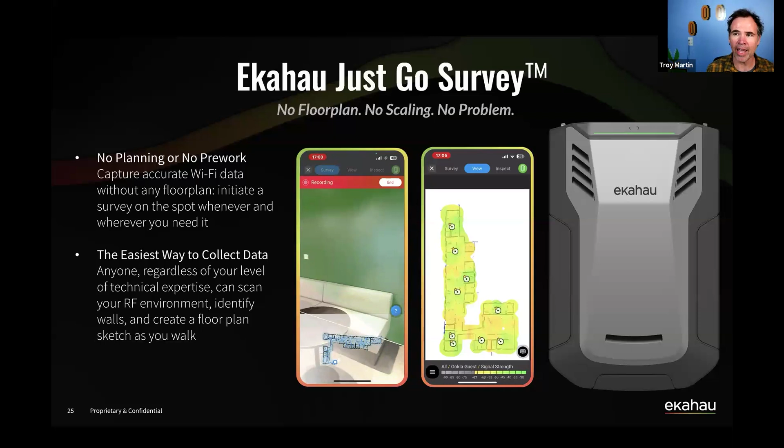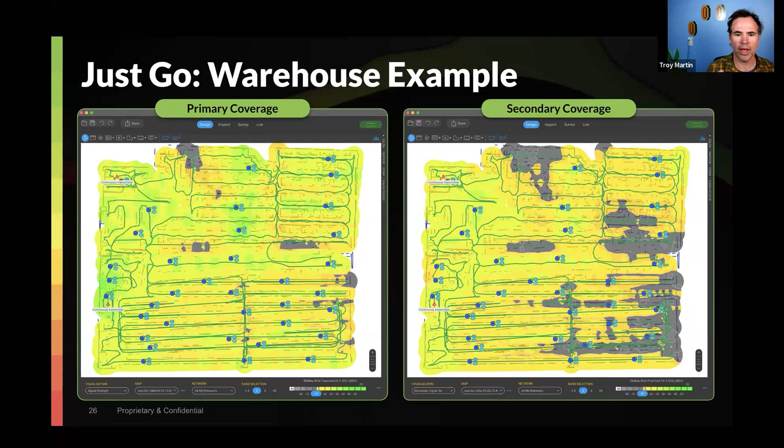Floor plans just aren't that easy to come across. So if you don't have floor plans when you go to site, you can leverage the Just Go survey mode, and Ekahau will automatically build and create a floor plan for you as you perform that survey. Here's an example of what it looks like walking through a warehouse, collecting survey data and building out the walls and layout for you. You can then easily visualize primary and secondary coverage. It's a fantastic tool in those scenarios where you don't have floor plans.

You can also look at the visualizations you'd typically use to deliver great Wi-Fi, identify any rogue access points or sources of interference you may need to track down while on site, and confirm that's actually the device causing your interference before you leave. If you're able to identify it before you leave site, that gives you the confidence that you found the cause of those issues.

What's coming to Site Survey is something I've been looking for a while. Currently, with the Just Go survey method, you have to perform the entire survey in one pass, surveying that entire floor. We're adding the ability to pause and then continue within the same survey. So if something comes up, something blocks your path, you need a lunch break, or the fire detector goes off and everyone has to evacuate, you can pick up where you left off.

We're also adding the ability to detect furniture like chairs, desks, other obstacles, and devices, and better represent them as part of the floor plan that gets automatically created when you leverage the Just Go survey. Some fantastic improvements coming to make it more seamless to use that method.

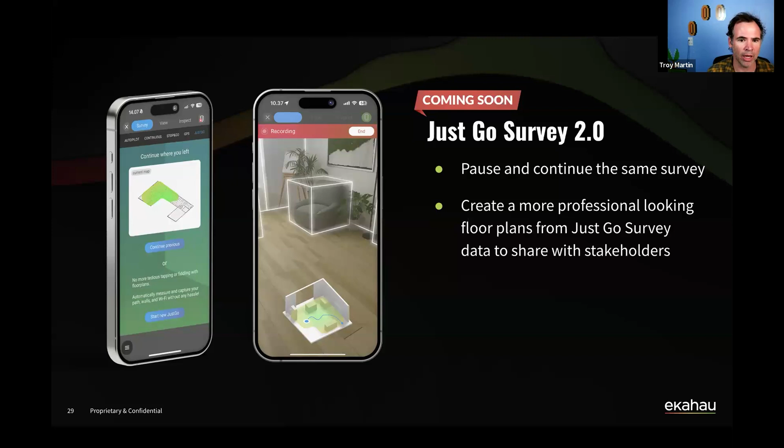Yeah Troy, I can see people getting very excited in the chat about these features. For anyone who wasn't aware, Ekahau is part of Ookla, and inside Ookla sits Speedtest, Ekahau, Downdetector, and RootMetrics. Why is that important for you as Ekahau customers? Because that means you're going to get access to more data.

Some ways we're integrating the other brands into our products: we already have Analyzer running a Speedtest integration, so you can see RF data while running a speed test and understand if you've got issues with your network, internet throughput speeds, or things to do with your RF. One of the new things coming to the Analyzer app is a channel utilization graph where you can see channel utilization and speeds over time for uplink and downlink, a nice way to see what's going on versus the RF spectrum live. This is a nice new feature coming into the Analyzer application.

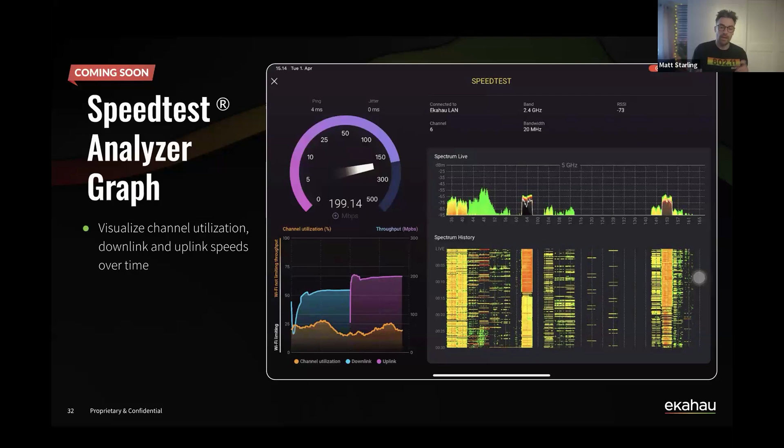In the survey app, one thing I've always done for the longest time, even before joining Ekahau when I worked in professional services, is go to a specific critical location in the environment and run a speed test, take a screenshot of it, then use the note feature inside the survey app to upload that picture and correlate it to a position on the map. Because in some locations you might get faster speeds and in others lower speeds, which could indicate performance issues or network related problems. Very soon in the survey app you'll be able to just run the speed test and correlate the position on the map natively inside the application, which I am very excited for. I love seeing the integrations between our brands.

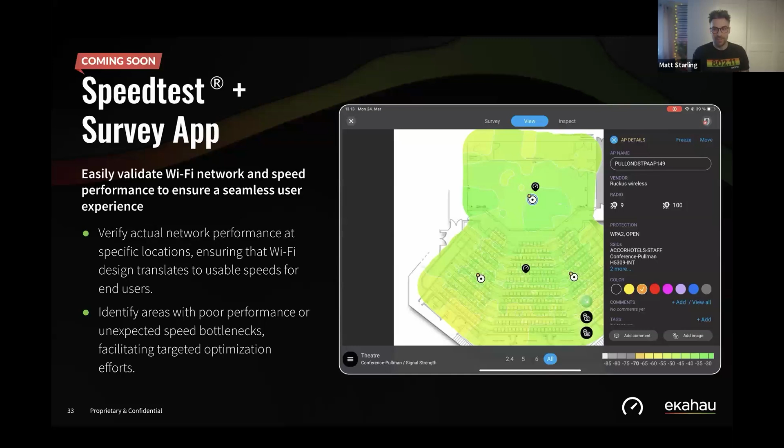Another thing we're adding is the ability to perform a packet capture for 10-minute intervals. The idea is that when troubleshooting a scenario, you have to recreate that event, and sometimes you need a certain amount of traffic to pass through or applications to hit a certain state, so we need extended packet capture durations. By extending this to 10 minutes, more users will have the opportunity to recreate those performance or WLAN issues and gather the packets to understand what's going on, because we all buy into the mantra that packets never lie. Just be mindful, sometimes the packet interpreters do lie to you.

So we have Optimizer, as some of you are very familiar with already, for survey data. If you do a survey and push it to our Optimizer, we can automatically analyze your network for you and give you specific recommendations to improve it. But we have a new feature that's come to Optimizer.

If you use your API key, you can pull in data for your environment and get recommendations based off your configuration on ways you can improve your network. So I think, Troy, you're going to do a quick live demo of this.

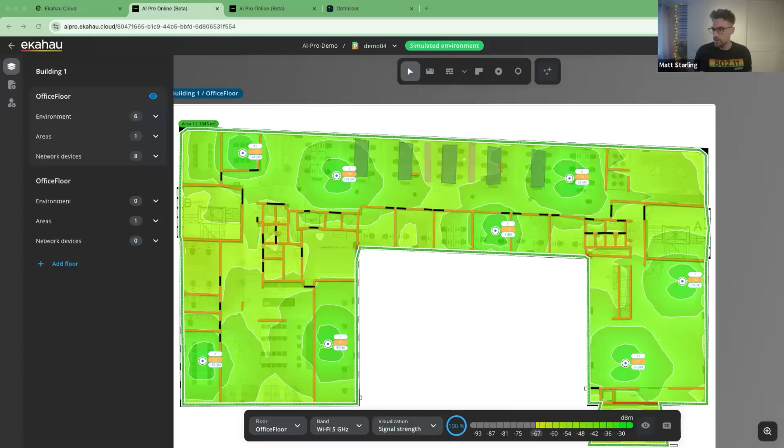So if we jump in again, our main dashboard, when we first launch AI Pro, if we click on the Optimizer button, it opens up this window. What's new is there's a Preview Networks Live beta version across the top. If we click on that and then click Start New, this is where we can paste in our API key, and then click Next.

We can choose the organization that we want to focus on, and then view based on the data that we've collected from that vendor. In this case, it's from the Meraki cloud dashboard. Based on best practices, we can evaluate what's currently configured.

Here's my little cue cards that are set up relatively simply: red, orange, green. Green means you're in good shape, orange is room for improvement, red is you should probably fix that. So as an example, I can look at my minimum basic rates.

You may have seen this if you're familiar with the Cisco Meraki Cloud. Normally when I configure my networks, I would customize this appropriately, but you have that little slider to set your data rates going from 1 all the way up to 54. If you happen to set that slider to 11, it includes both your 11B data rate as well as 11G data rates, so now you're mixing two different technologies, and we're flagging that as an issue.

You can also check to see if you have features like management frame protection enabled, or if you haven't optimized your SSIDs when you have too many SSIDs shared across different bands, or even, which is sometimes a little less obvious and something people aren't always digging into, you can check to see if there's firmware updates for your access points.